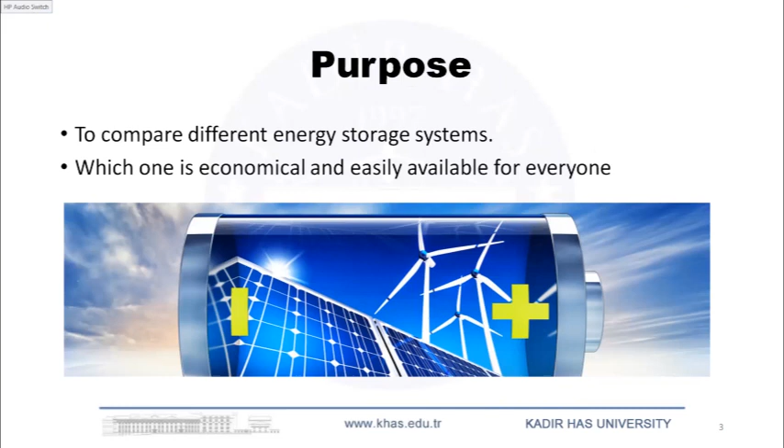First of all, I need to explain the purpose of my presentation and what I will explain. The purpose is to compare different energy storage systems, and at the end we will see which one is more economical and which one is easily available for everyone. This is the main purpose of today's presentation.

For today's presentation, I will come to storage systems, but before that, let me talk about why we need storage systems and how they will help us. I will start from the sustainable energy transition.

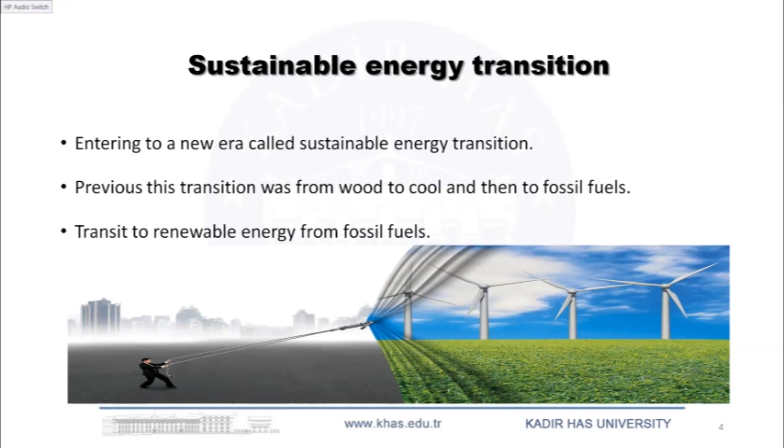We are entering a new era called the sustainable energy transition. The first transition happened in the very beginning of energy use: from wood to coal, and then from coal to fossil fuel and so on. But nowadays we will transition from fossil fuel to renewable energy.

But why do we need to transition from fossil fuel to renewable energy? We have three main issues with fossil fuel. The first is that it's not distributed equally on the surface of the earth. And we are using it very fast, and it's very limited.

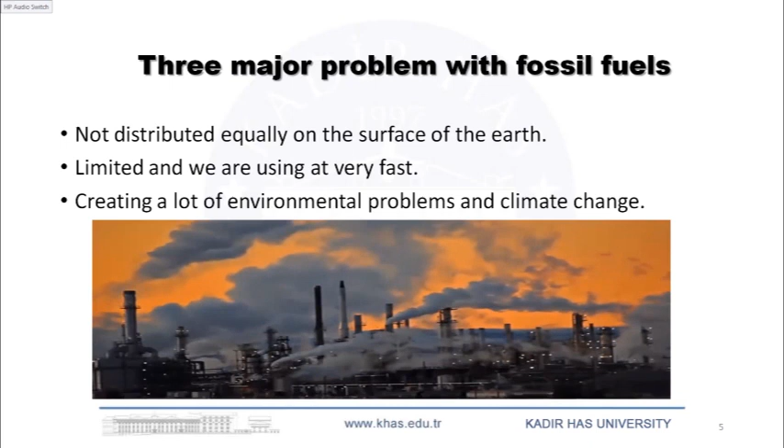The most important issue is that fossil fuel creates a lot of environmental problems, climate change, and other things. Because of these three major problems we have many other issues too, but we will only take these three major problems into account.

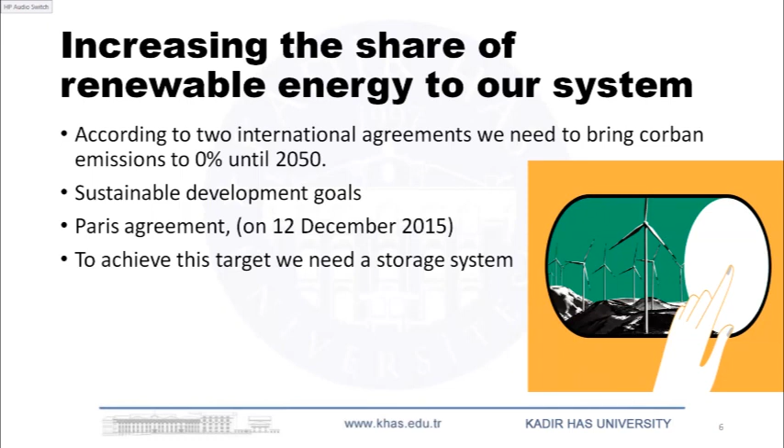Now, how will we get rid of fossil fuel? The first step is to increase the share of renewable energy in our current system. There were two international agreements: the Sustainable Development Goals and the Paris Agreement, held on 12 December 2015. The main goal was to bring carbon emissions to 0% by 2050. How is this possible? Still, we will do it.

But renewable energy has two more issues. One is that it's intermittent in nature, it's not available all day. For example, solar energy is only available when there is sun or on a sunny day, just like wind energy and similar sources.

It also depends on geographic and climatic conditions. If the climatic condition changes, the output from renewable energy definitely changes. The same applies to geographic location, for example it depends on altitude, sun exposure, and wind.

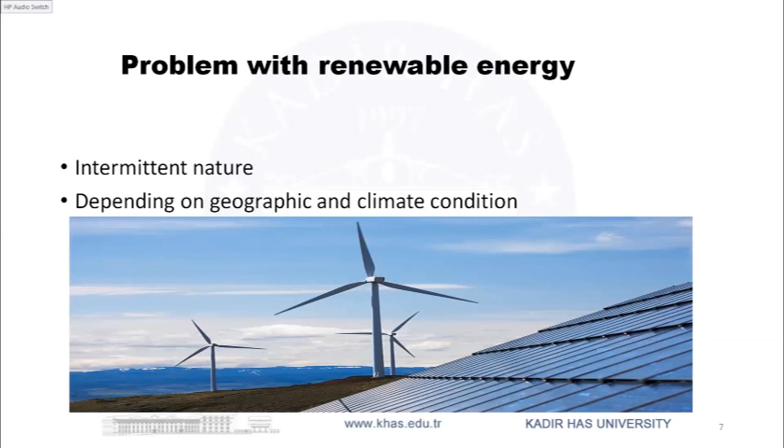So what is the solution, and how will we cope with reducing the use of fossil fuel? The solution is storage systems. We will store this renewable energy and then use it whenever we need it.

A unit pumps water to the high elevation to store electricity in the form of hydraulic potential energy, for example during the night or on a weekend when we don't need such an amount of energy and the price of energy is low. We use a pump to bring water from the low reservoir to the high reservoir, and when there is demand during peak hours, we convert the potential energy of the water into electrical energy.

It's the same idea with compressed air energy storage system, which is another commercially available technology. It's almost the same as pumped hydro storage, but with some differences—we have different components like a motor and a compressor. We are storing compressed air, and then using it when we need it.

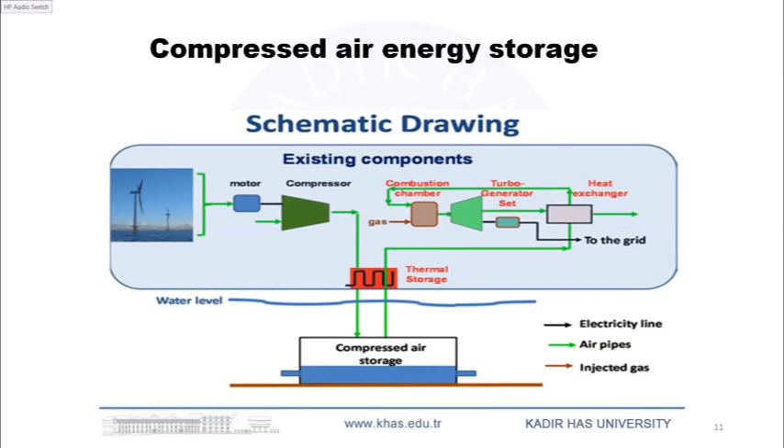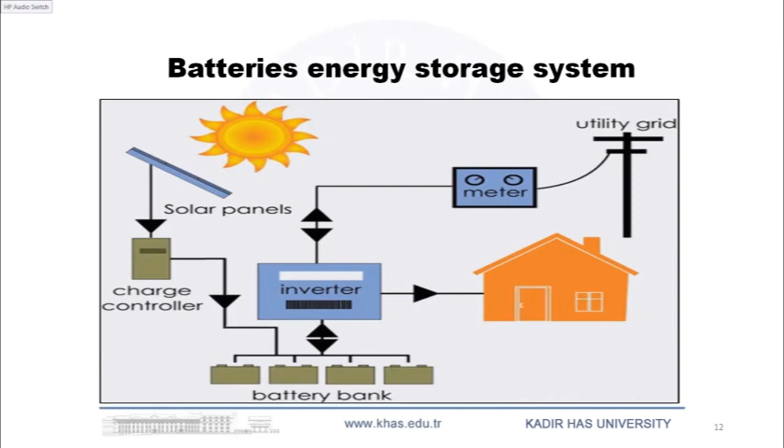The third one is battery storage system. Battery is the oldest form of electrical storage energy, using rechargeable secondary batteries. A battery consists of one or more electrochemical cells, and each cell consists of a liquid phase or solid electrolyte together with a positive and negative electrode, anode and cathode. We store energy in the form of electrochemical or chemical energy, and whenever we need it, we can use it.

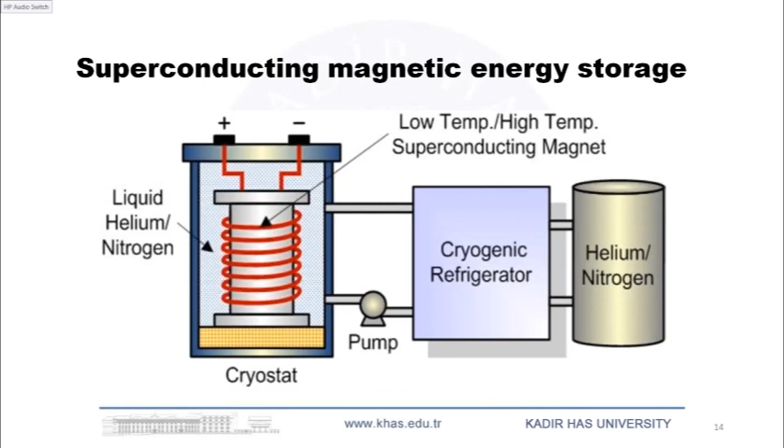So this one is flywheel, and the other one is superconducting magnetic energy storage. You can see the coil in red color, and we pass current here. First, if I need to explain the superconductor, there is no resistance, resistance is zero. Superconductor is the known technology to store electrical energy directly as electrical current. Direct electric current passes through an inductor made of superconductor material in a circulator, so the current can circulate independently with almost zero losses. If there are no losses, it's not possible that we can lose our current. So we store this energy in the form of a magnetic field, and whenever we need it, we can use it.

The other one is the supercapacitor. Capacitor is the most direct and lateral way of storing electrical energy. In its simplest form, one is the positive plate and the other is the negative plate, and between them we have some dielectric material, like an insulator we can place. So if we need a high amount of energy, we will use this dielectric according to our requirement.

Now we will compare all these. It's a comparison table, and we will see which one is good and how we decide that. If we look at the comparison table for pump hydro storage energy: power rating, discharge time, self-discharge per day, suitable storage duration - for how much duration we can store our energy, whether a month or per hour - and what is the effect of the storage energy on the environment, and the last one is capital cost.

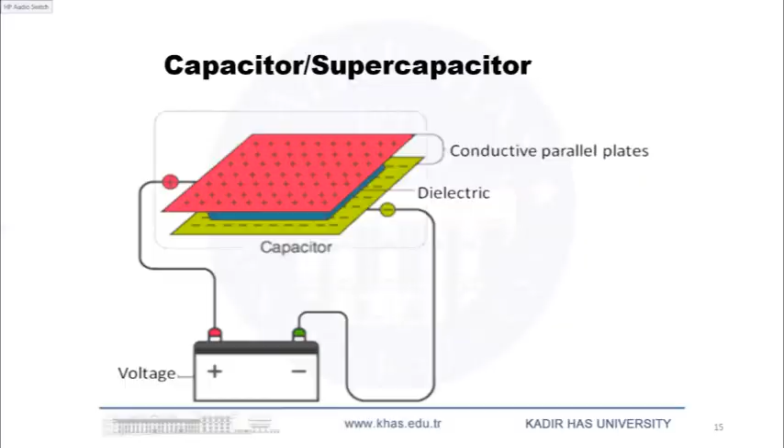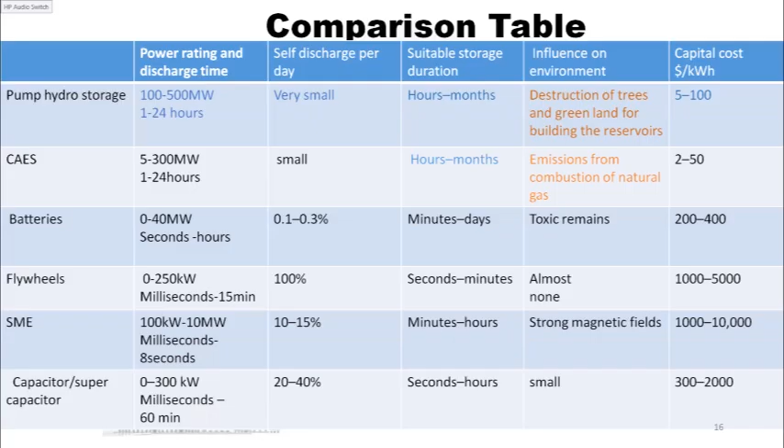For example, if we are using a synchronous motor as generator and as motor, it will work best as a generator, but efficiency will not be best as a motor. For example, with an induction motor - if we use induction machine as a motor, its efficiency will be good, but if we use induction motor as a generator, its efficiency will not be good. So we need to think about these things.

And the last one is the cost - the capital cost is so high, and the environmental effect. So we need to think about how we can decrease the cost and how we can minimize the environmental effect of the hydro system. Thank you so much for your time.

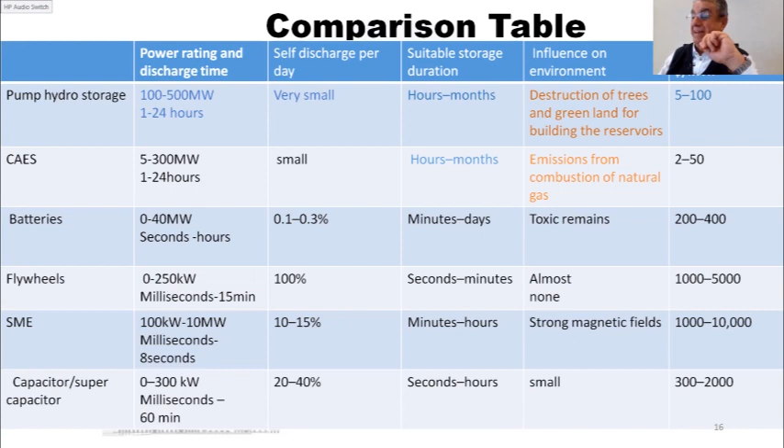You are right, it's a good presentation, but it could be enriched by putting some references, as Okan Yardımcı said, and you could really make it a little bit better. Thank you, thank you so much.

A small following comment: the contribution of these technologies to solar and wind resources can be different. In general, storage systems can improve solar generation in a better way, but you could also add how different storage systems can contribute to different renewable energy sources. This comparison can be very nice to see in your research.

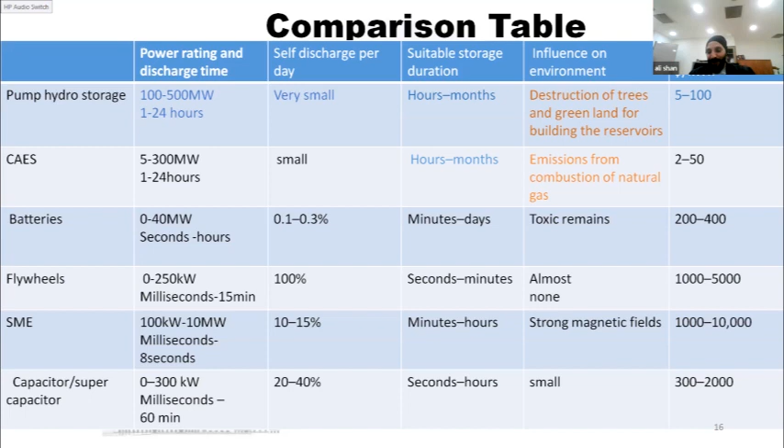Yes, definitely I will do it. All right, thanks, definitely I will. Thanks a lot, thank you Ali.

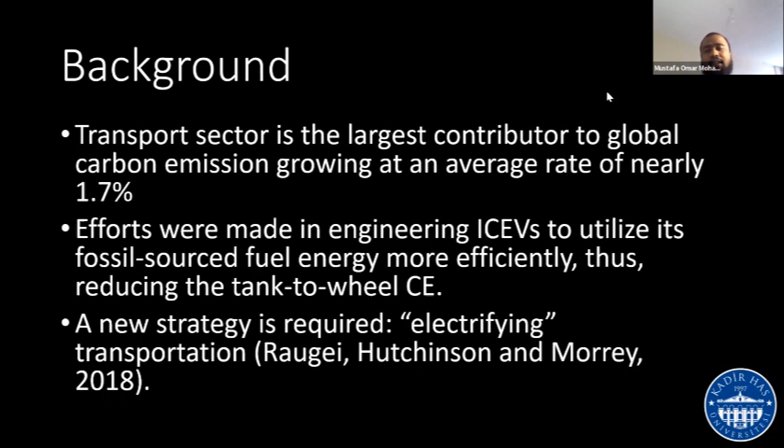Now, a strategy that has taken focus in the past two decades was to electrify transportation. That shifts the problem from attempting to get carbon emissions across different sectors to zero, to instead focusing on the problem of transportation and the problem of power and electricity generation separately. We can now focus on solving the problem of electricity, since the transportation sector would be completely running on electrical power. That's the underlying idea behind electrifying transportation.

We have seen quite a lot of a push towards adopting electric vehicles in several countries, with China now leading and the EU countries coming in second place. This is all an attempt to reduce global carbon emissions and reach net zero carbon levels. There were international agreements such as the Paris Agreement, and likewise internal policies that aim to satisfy or reach that target.

Some of these policies, as I highlighted in the second point here, include lower taxes, free parking, and other incentives that have been used to push the public, as well as the private sector - individuals as well as corporations - to move towards electric transportation systems and electric vehicles.

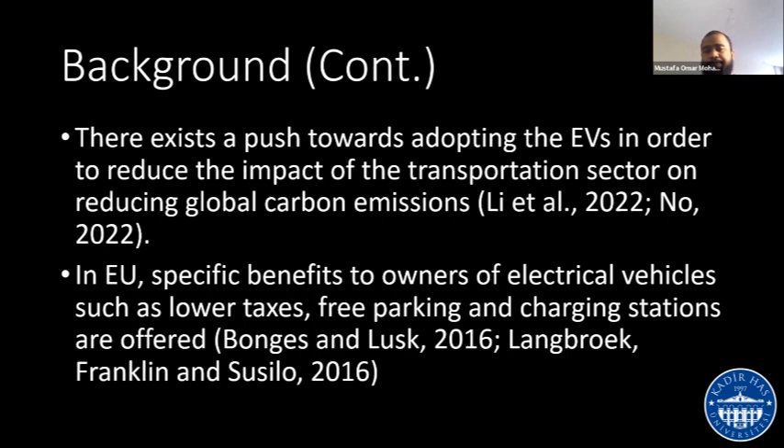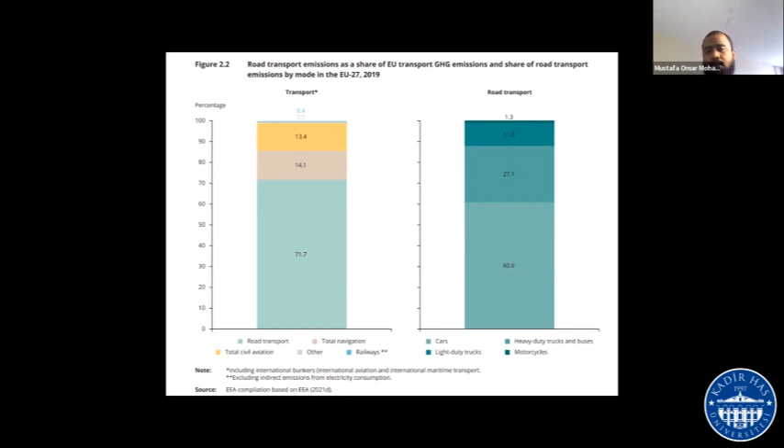So to zoom in on the problem statement, I would like to ask the question: have these policies, strategies, and interventions been effective in reducing carbon emissions, and to what degree have they been effective?

We've been implementing several policies throughout the past decade in an attempt to increase electric vehicle penetration into the sector. And the question is, how effective have they been in reducing carbon emissions?

With this research, I aim to answer the following questions, and although some of them are quite broad, I do hope that this would contribute in some way or another to these questions.

Firstly, whether these policies that are implemented across different geographical regions align with the targets that have been set for a net zero carbon emission world. Moreover, what are the challenges faced with adopting these policies and implementing them?

And how have these policies evolved over time, perhaps over the past two decades, throughout this journey towards the target we want to achieve?

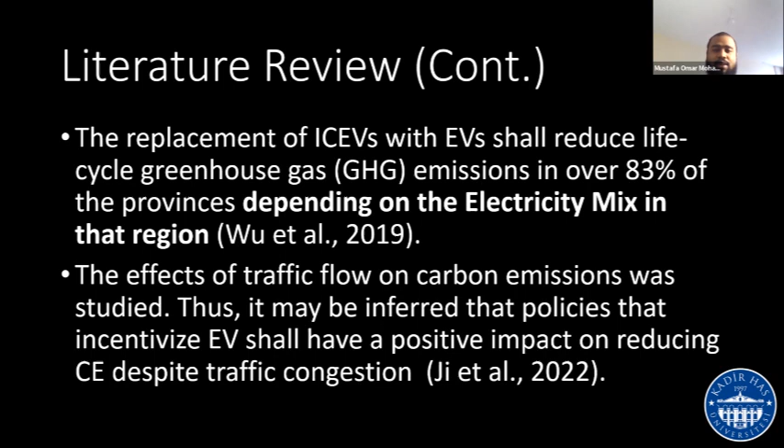As for the methodology, I aim to conduct this study by starting with classifying all the literature in the past decade, or perhaps the past 2 decades, and categorizing them based on geographical region, after which I can assess certain important metrics in trying to answer the question: how successful has this electric vehicle policy been in this specific region, and maybe looking at the factors that contribute to the success or failure of a specific electric vehicle policy.

I also realize that if I can find some way of quantifying these measurements rather than have them qualitatively conducted, that would also improve the research and maybe give it more value. I will look at things such as carbon emission changes throughout this period, how EV penetration in a specific sector or region has changed throughout that period, what are the associated costs with implementing those policies, and perhaps also a comparison across different regions.

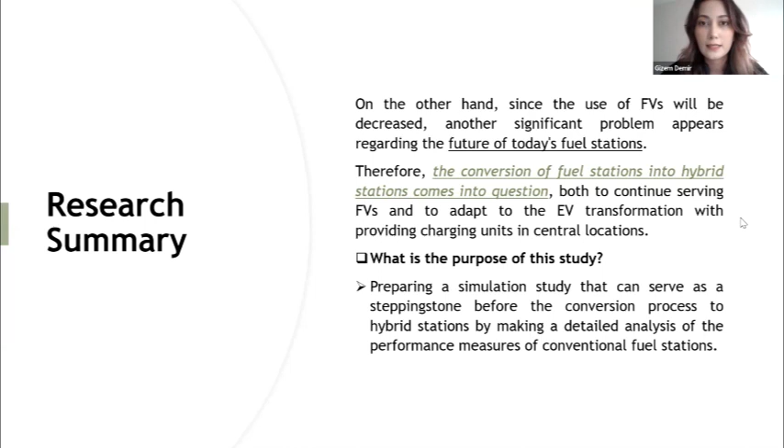Let me talk about the stages of this work. First, a typical fuel station is examined in detail in terms of components and process flow. Then the model assumptions and input model are determined clearly, and a computer model that accurately represents the fuel station is constructed using simulation software. Next, a verification is made in which the key output variables are compared to test that the theoretical model is correctly represented in the computer model.

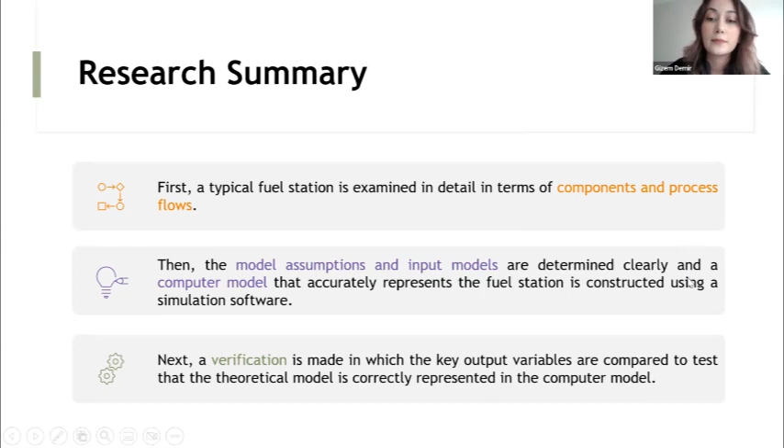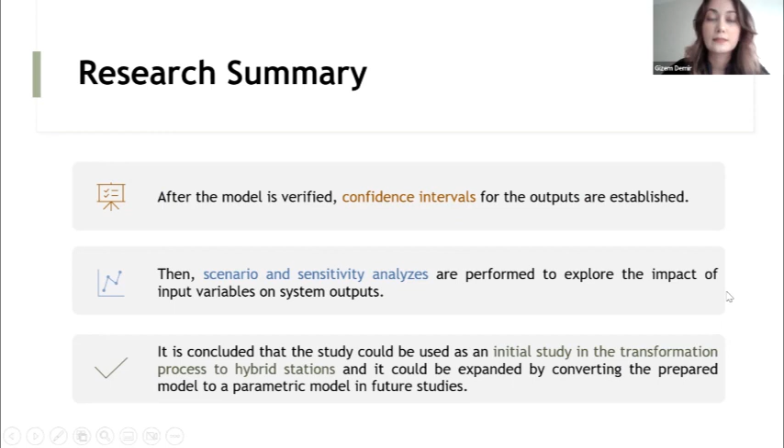After the model is verified, confidence intervals for the output are established. Then scenario and sensitivity analysis are performed to explore the impact of input variables on system output. This study could be used as the initial study in the transformation process to the hybrid station, and it could be extended by converting the prepared model into a parametric model in future studies.

Another title is Background and Motivation. Most articles in the literature have emphasized that fuel stations are a good alternative for the position of EV charging units, and studies have been carried out on this subject. However, many of these papers generally focus on the structural adequacy of the station in the conversion of fuel station to hybrid station, and didn't touch on the effect of the transformation on the operating system of the station. Some of these studies are as follows.

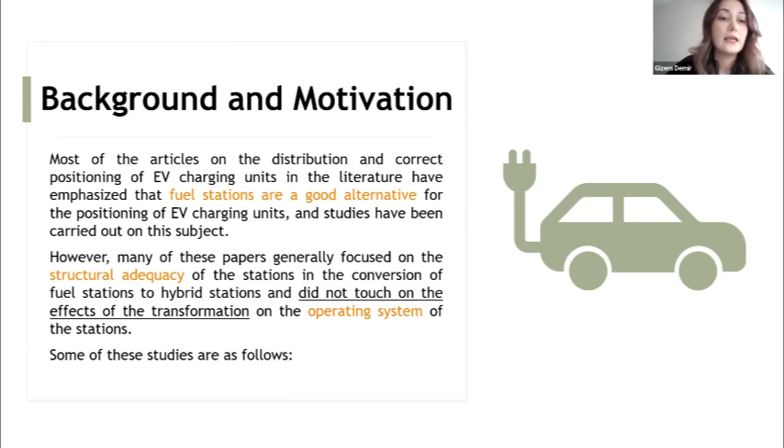First one is Cai et al., who conducted a case study using large-scale data for public charging station planning and experimented with different scenarios for installing charging units, concluding that gas station-based chargers are more suited to consumer habits.

Second one is Miralinaghi et al., who suggested the gradual conversion of existing fuel stations into charging stations for EVs by analyzing consumers' purchasing trends and route choices, and the location of EV charging stations and FV refueling stations.

Third, alternative scenarios for the integration of EV charging units at gas stations were tested by Mauri and Valsecchi, and they concluded that existing gas stations are an acceptable location to install charging systems.

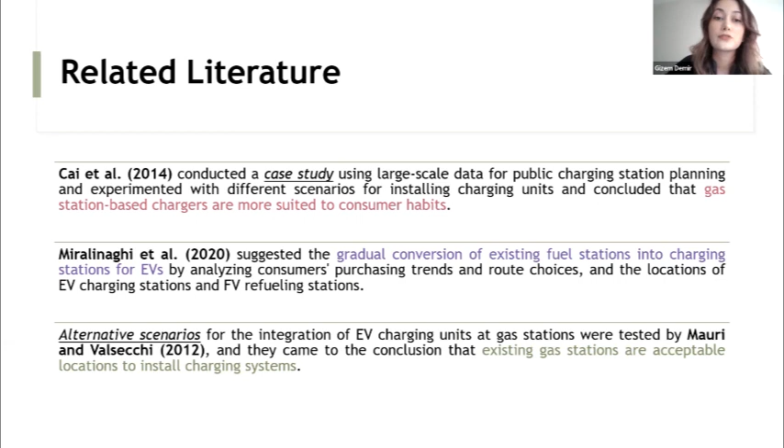Fourth one is Tang et al., who proposed an optimization model for the position of EV charging units by considering different factors such as passenger priority, passenger distribution, mileage, and EV distribution, and evaluated the effect of these variables on the position of the station using simulation and ANOVA technique. They noticed that variables other than passenger priority had an impact on the layout.

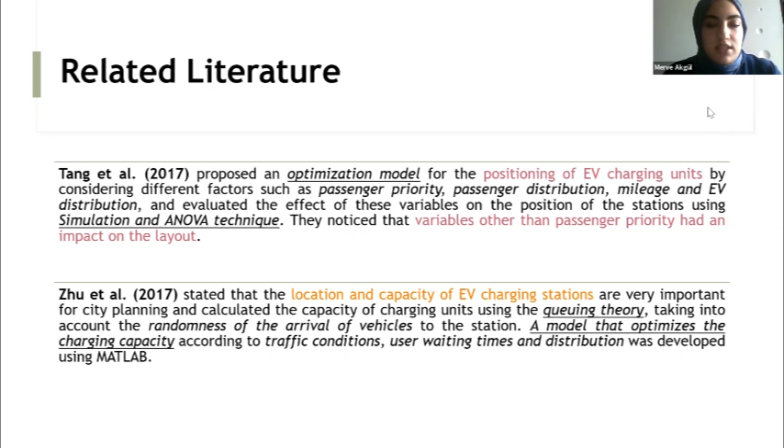Fifth one, Zhu et al., stated that the location and capacity of EV charging stations are very important for planning, and calculated the capacity of charging units using queuing theory, taking into account the randomness of vehicle arrivals at the station. Models that optimize charging capacity according to traffic condition, user waiting times, and distribution were developed using MATLAB.

Our conceptual model has 6 pump islands, while 4 of the pump islands have 2 pumps, and 2 of them have 3 pumps. 10 of these pumps provide diesel and gasoline service, and 4 of them provide LPG service.

Our customers can visit the gas station to refill, or to both refill and shop, and they have two types of payment: cash and card. In the area, there are 6 workers serving 14 pumps and 2 workers at the store.

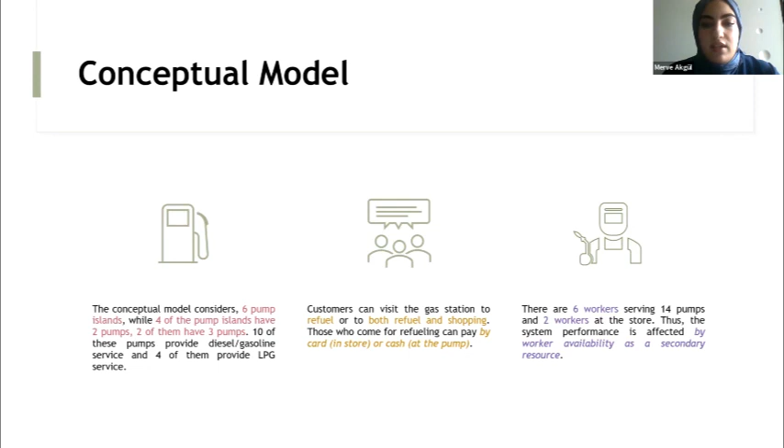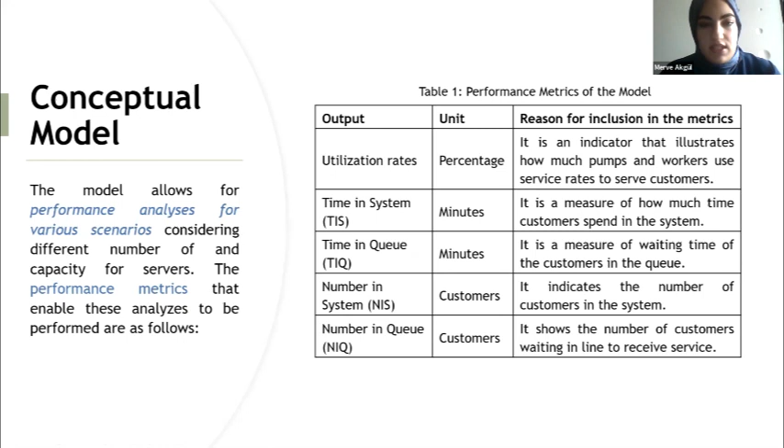The system performance is affected by worker availability as a secondary resource. The model allows for performance analysis for various scenarios, taking into account different server capacities. We have some performance metrics for analyzing, like utilization rate, time in system, time in queue, number in system, and number in queue.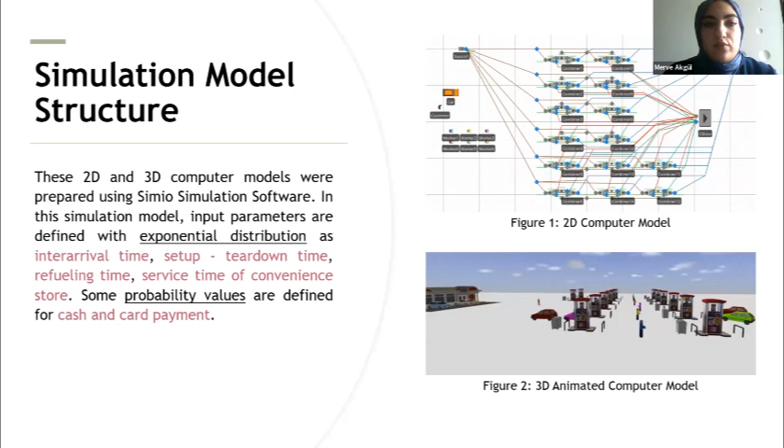Regarding the simulation model structure, these 2D and 3D computer models were prepared using simulation software. In the simulation models, the input parameters are defined with the exponential distribution, like inter-arrival time, setup and teardown time, refueling time, service time of convenience store, and also some probability values are defined for cash and card payments.

Model verification: why was it done? It was done to see if the main output and performance measures of the computer model were consistent with the results from the base theoretical counterpart.

How was it done? There are 2 interconnected systems in the model, because service availability for the customer depends on availability of pumps and workers. Therefore, the M/M/c queue model representing the overall system and the M/G/1 queue model representing the subsystem were developed.

What was the result achieved? It has been concluded that the output values obtained from the theoretical model were within the confidence intervals obtained from the simulation.

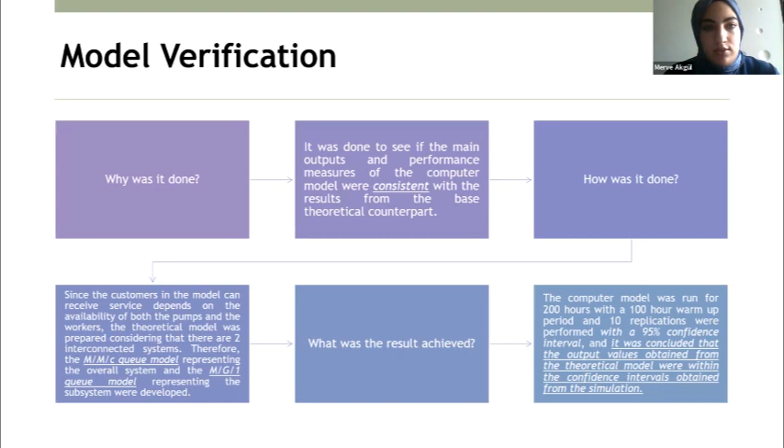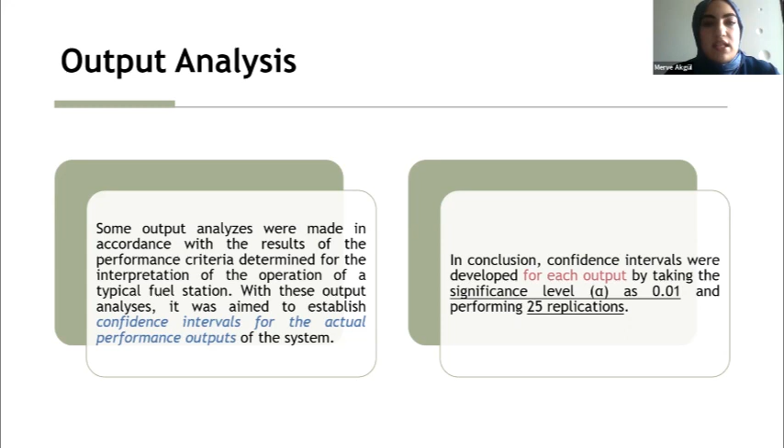We made some output analysis because, in accordance with the result of the performance criteria determined for the interpretation of the operation of a typical fuel station, it was aimed to establish confidence intervals for the actual performance output of the system. In summary, confidence intervals were developed for each output by taking the significance level alpha as 0.01 and performing 25 replications.

Scenario and sensitivity analysis: to investigate the impact of input variables on the operational performance of the fuel station, scenario and sensitivity analysis were performed. The operational performance of the system was measured by the outputs mentioned in Table 1. There are 2 types of input variables, namely uncontrollable and controllable. Uncontrollable ones depend on customer behavior, like inter-arrival time, pump selection of the customers, refueling time, and payment method of the customers. Controllable ones depend on the system elements, like worker service time and worker service discipline.

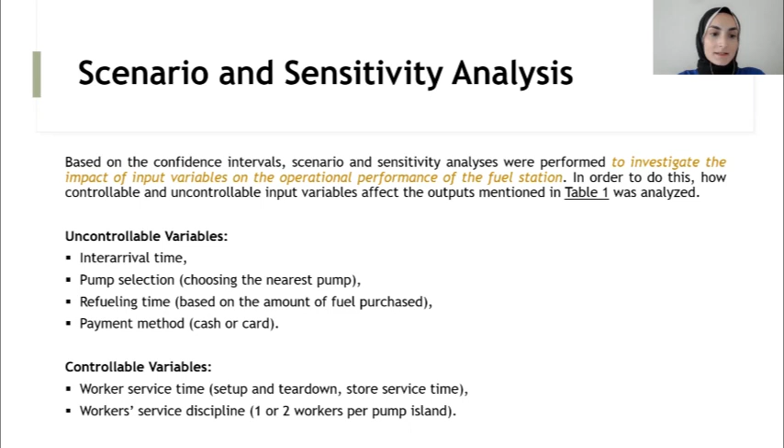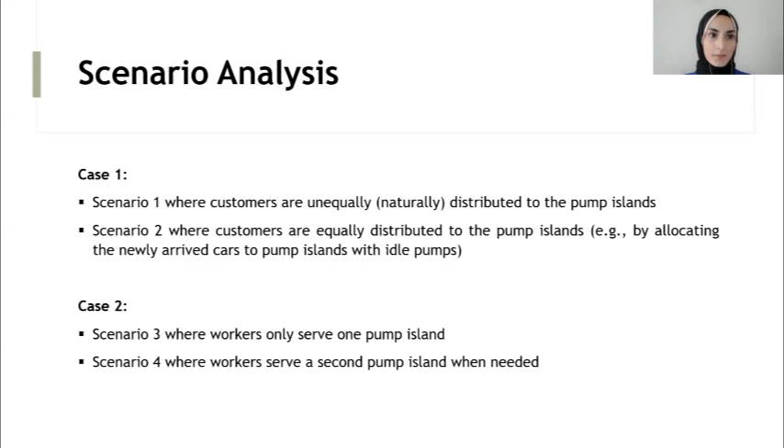In scenario analysis, two different types of cases were defined. Case 1 is about the distribution of customers, and case 2 is related to the working style of the workers. Scenario 1 represents the natural distribution of customers to the pump islands, and scenario 2 represents the equal distribution of customers, meaning allocating newly arrived cars to pump islands with idle pumps. In scenario 3, workers serve only one pump island, and in scenario 4, workers serve a second pump island when needed.

In our simulation model, there are pump islands with 2 pumps and 3 pumps, and pump islands with 2 pumps are closer to the entrance, so we look at the results of scenarios separately. In nature, customers generally prefer closer pumps, so thanks to the distribution made in scenario 2, based on pump availability, some outputs were balanced. These outputs are the pump and worker utilizations, waiting time, and number waiting. Since there was no change in the arrival rate and the system is stable, the convenience store utilization was not affected.

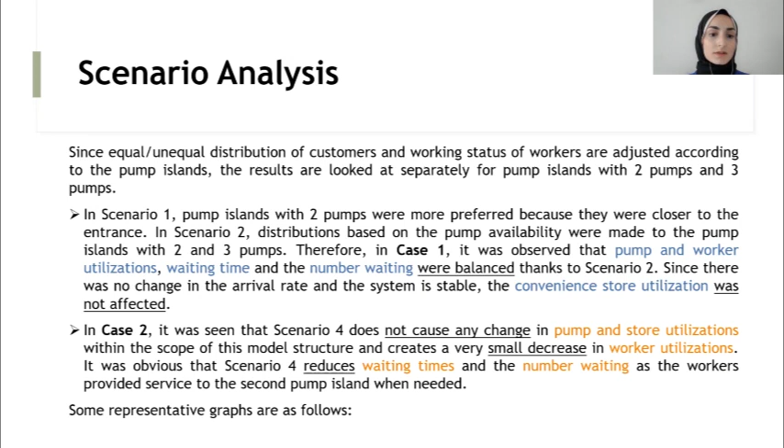Case 2 is dependent on the model structure. Results can change according to parameters like the number of pumps and number of workers. According to this model structure, scenario 4 doesn't cause any change in pump and store utilization and creates a very small decrease in worker utilizations. It was obvious that scenario 4 reduces waiting time and the number waiting, as workers provided service to the second pump island when needed. Some examples are in the next slides.

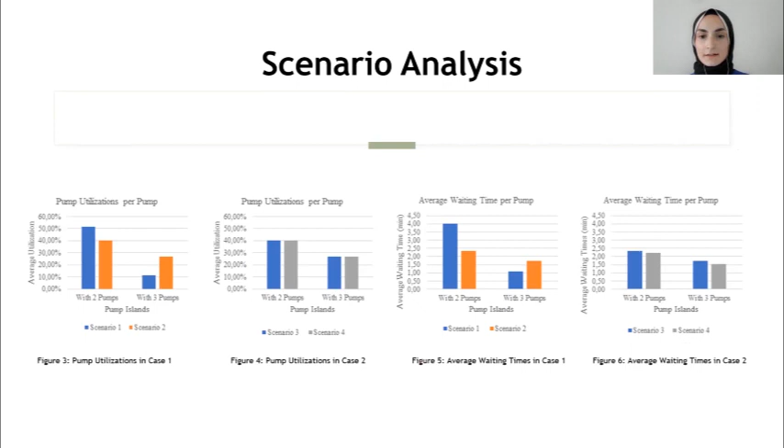When we look at figure 3 and figure 5, we can see the balancing thanks to case 1. As shown in figure 6, waiting time is decreased by scenario 4.

Sensitivity analysis was performed to measure how sensitive the outputs are to changes in the input variables. For this reason, changes were made in the form of gradual 5% increases and decreases in each input variable, and the percentage changes in the outputs were analyzed.

As a result, it is found that all outputs are significantly impacted by the change in inter-arrival rates. It was observed that all inputs have a similar effect on the average waiting time and average number waiting. It has been noticed that while factors like the cash payment rate have a significant impact on the outputs related to the store, variables like the length of pump activities have a great effect on outcomes related to the pump and the worker.

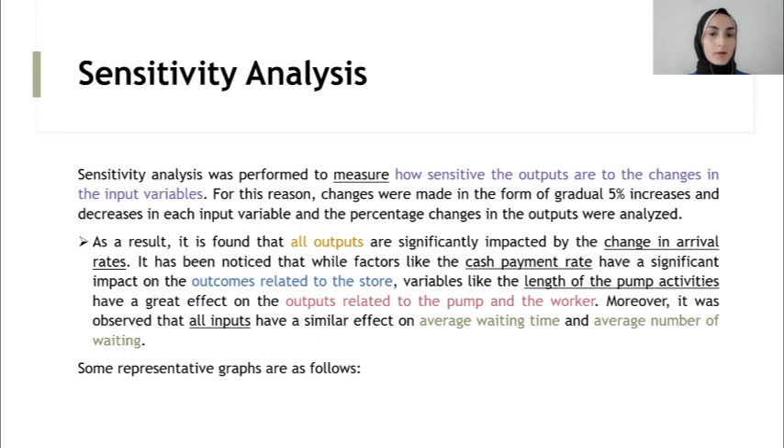As an example... I think he's disconnected.

As I mentioned, my work is about converting the momentum energy of blowing air around a local generator into electricity, which is a nice concept for sustainable energy. I started working on my project since I received an email from Kadir Has University, about two weeks ago. Unfortunately, I couldn't find any related studies for my topic, so I worked on it individually with my supervisor, Mr. Hamid Farangis Zadeh. Inshallah, I will do my best to prepare a nice and scientific paper for this topic. The objective of our work is about parts of the generator and how it's working, and this is our idea.

From the physical point of view, there are different types of windmills. I will use windmills for producing electricity, and we will use two different types: horizontal and vertical. We will use it for the cooling system, the fan, and the exhaust. I'll speak a little fast since I want to finish in 10 minutes. You have a break, and we will start a new section.

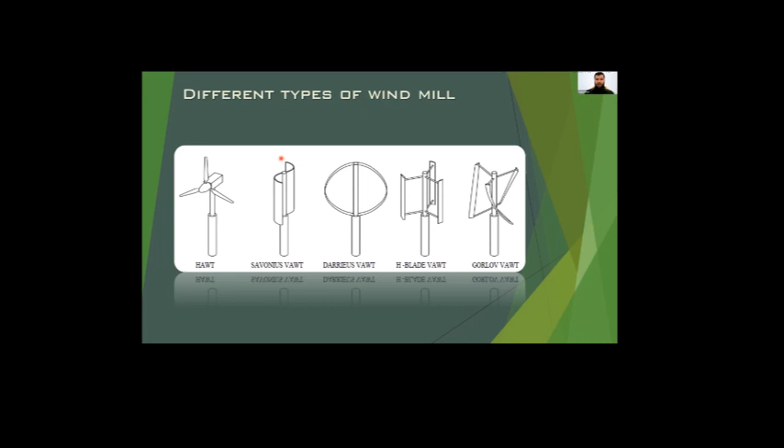This is a fan that we can have, whether horizontal or vertical. We can use this as a vertical one, and this is a horizontal one. This is the case of my study: a horizontal noiseless windmill for the fan that I mentioned.

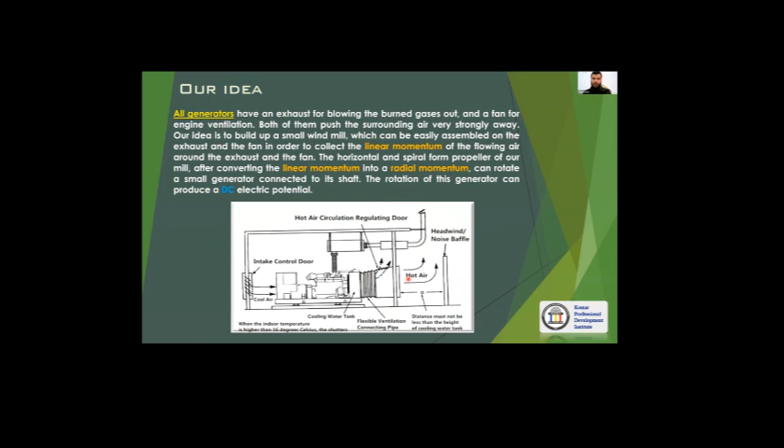For this cooling system, this is a fan that came out and air strongly pushes the air out. So I will use this as a fan of the generator, and this is our fan that we will use in front of the generator's fan, and we produce a DC current.

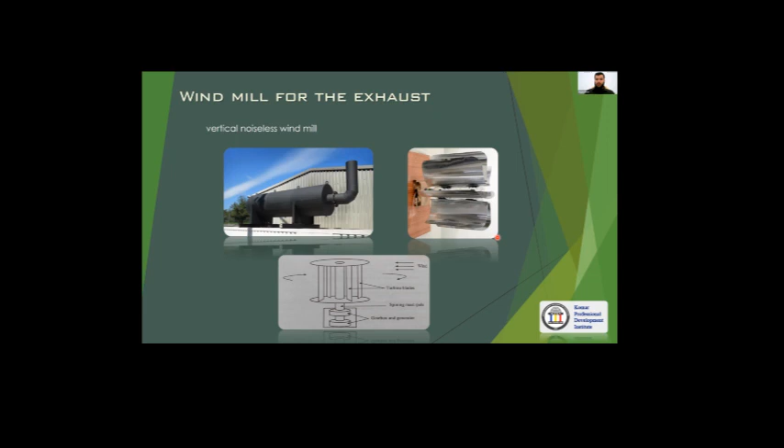And this is another prototype, as a vertical one we can use as a prototype. We put it above the generator's exhaust, and it converts the linear momentum to radial momentum, and we can use the roll bearing, second-hand roll bearing. We can find these in factories as second-hand. It's very good due to less friction, and we can use second-hand metal we have in factories, like those used for tanks. We can have small generators, and we can use them to produce electricity.

Our conclusion is that it's clean, economical, and environmentally friendly. It's small, noiseless, easy to assemble, easy to use, and recyclable. Thank you for your attention.